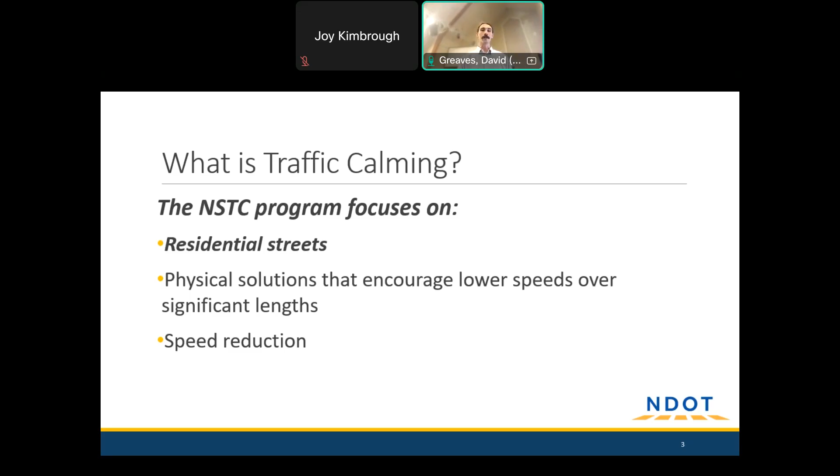So jumping into the program overview, what is traffic calming? This is a program that focuses on residential streets, not the arterial boulevards or commercial corridors, mainly focused on neighborhoods. The projects we do focus on physical solutions to encourage lower speeds over significant lengths. We don't tend to do spot treatments or single intersections - people apply for whole segments of street, several blocks at a time usually. The primary goal of this program is speed reduction, which ultimately ties into safety. We'll talk about that in more detail in just a minute, but you'll notice that those are the things our tools will tend toward.

The reason safety and speed are so closely linked, and why reducing speed results in better safety outcomes, really comes down to physics. When a pedestrian is struck by a vehicle, they have a pretty good chance of surviving if the vehicle is going 25 miles an hour or below. That chance unfortunately decreases as speeds climb - at 35 miles an hour that goes down to about 2/3, and at 45 miles an hour you don't really have a good chance at surviving. So when we see streets in neighborhoods where people live overlapping with high speeds like that, it's an indication to us that street is a pretty good candidate for traffic calming, just to get the driving behavior a little more in line with what a safe neighborhood street might look like.

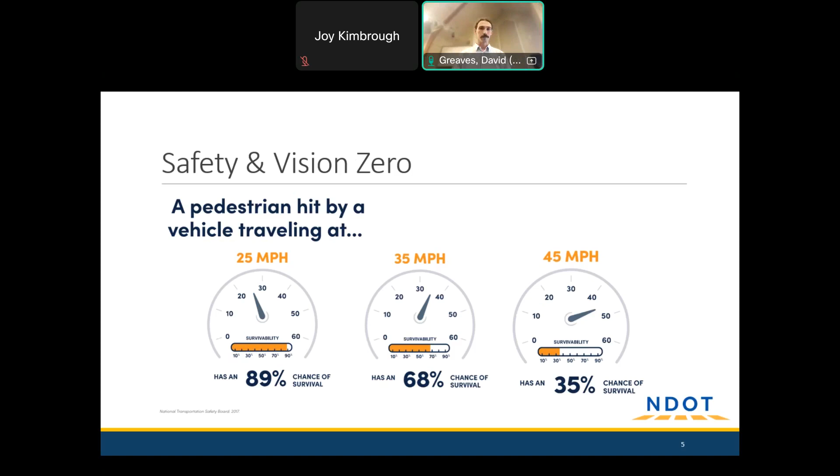This is a really popular program. In March of 2025, when Rawlings Road was selected, y'all were one of 25 streets chosen from a pool of just over 600. We'll talk about exactly how that selection process happens in a bit. All that is to say, there are a lot of traffic calming projects that have been done, but even more that are seeking to be done. So we work as quick as we can, but there is a lot of demand around Davidson County. Just so everyone knows, there is a live traffic calming project tracker, and a screenshot of that is on the right side of the screen.

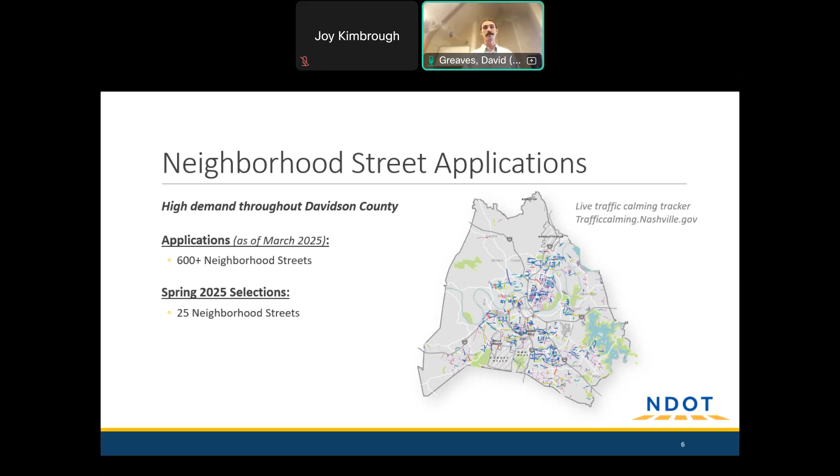It basically color codes streets as they've applied, get selected, and then move through the process. There are a few tools that the traffic calming program has in our toolbox. We'll take a look at those in detail in just a minute, but there's a lot of things that Metro does that this project is not really a good fit for. Sidewalks are a good example, traffic signals, bike lanes, things like that. We do want to make sure everyone is aware of Hub Nashville as a resource to make requests from Nashville's government for all sorts of things. That can be accessed by calling 311, going to hub.Nashville.gov online, and there's also a mobile app if anyone prefers to use that way. If we do encounter anything that you all are interested in that would be a good fit for a hub request, I'll be sure to let you know and help you access this if you'd like.

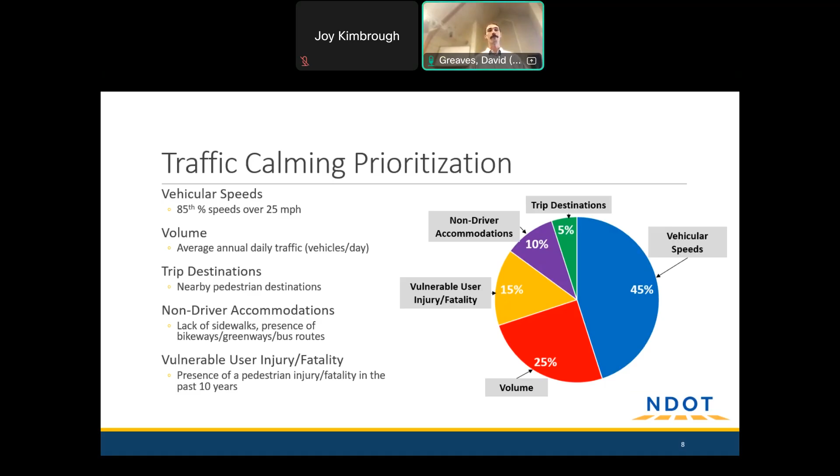So on to how Rawlings Road was selected. Basically, when a street applies, we take the application and then have a period of time when we study all of the streets that have applied. We measure speeds, we count the volume of cars, and we look at a few other factors: crash history, whether or not there are sidewalks, and how close a street is to things like schools, community centers, things that might generate pedestrian trips. So all 5 of those get a score, they're lumped together, and every street gets a score, and those are all ranked top to bottom. So basically, y'all wound up in that top 25 through that kind of data-driven process.

Some of that data that we collected on Rawlings Road was the 85th percentile speed. That was 38 miles an hour. What that means is of everyone that drove on the road that day, 15% of people who were measured were going above 38 miles an hour, and 85% were going 38 or below. So that's just a statistic that we use to gauge the general speed on roads and compare them amongst each other, but it is by no means the maximum or the average, anything like that.

We also counted 616 vehicles used Rawlings that day. I'm sure, as you all know, that's way more than live on Rawlings, so we suspect there is some cut-through traffic going on. And then you have a pretty narrow street - 19 to 20 feet is just about 2 normal travel lanes. And that'll impact some of the tools we have at our disposal.

This is a map of the project. It's just this short section between Clarksville Pike and Eaton's Creek Road. This magenta line here does mean that the other side of Rawlings has applied with a separate application, so they also have data that are being ranked and scored. We hope it'll get selected sometime soon.

So that is kind of the big program overview. And now I want to hear from you all just sort of about your street before we go and talk about the toolkit. So I guess one question to start off with is what do you all experience on Rawlings that traffic calming might be good for?

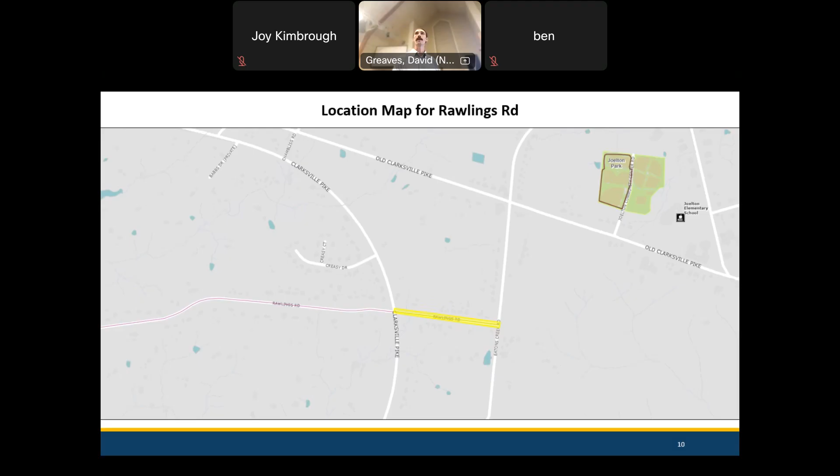Yeah, understood. I think there's supposed to be a limit on trucks, delivery trucks and the like, unless they're delivering on the street—they ignore that too. Is it trucks that are just coming through, or are they delivering? We get semis, dump trucks. Nancy Cole is one of the biggest—oh, I see, like full semis, tractor trailers, not small ones. Tractor trailers getting back up on the 24. These big tractor trailer trucks coming through there.

I think a lot of this is a product of what's probably going to end up being a Hub Nashville request, which is there's no traffic light at the end of Old Clarksville Pike where it meets Clarksville Highway. Even though that's a wider road with a higher speed limit, nobody uses it because you can't make the left-hand turn from Old Clarksville Pike onto Clarksville Highway due to a blind hill. So it's only advantageous to go that way if you're making a right turn. Anybody wanting to make a left uses Rawlings as a cut-through.

So it almost sounds like if we vote yes to traffic calming measures on it, it might need to be paired with a Hub Nashville request to put a traffic light in at the end of Old Clarksville Pike, so that traffic is directed that way onto the higher speed limit, safer road.

That's the same with the fire department. The fire department comes through Rawlings, which I don't mind, believe me. But the way the fire hall is structured, when they come out for a fire, they have to make a right turn, a 90-degree turn, for about 100 feet. Then they have to make a dead stop at Eatons Creek Road. Then by the time they get up to speed, they have to slow down again to stop and make another 90-degree turn onto Rawlings Road to get in line. It takes them forever just making a 90-degree turn.

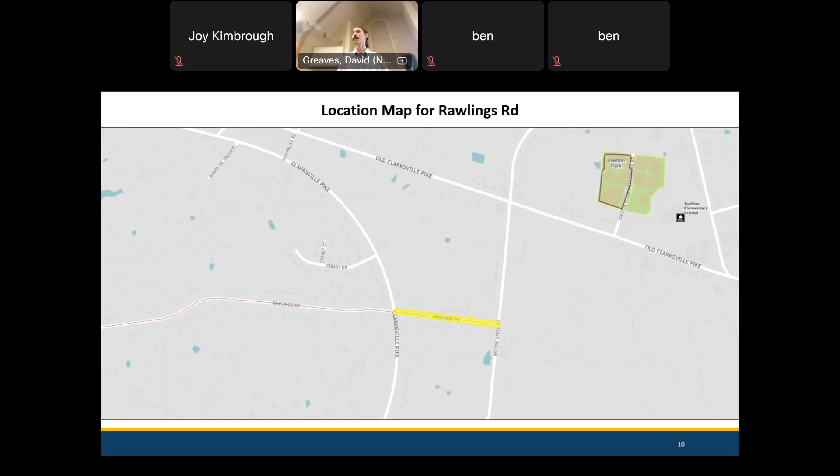Diving into the toolkit, the most common traffic calming measure we use in Nashville is speed cushions. Most people have encountered these somewhere in Davidson County. They work similar to speed bumps but with a higher target speed, so they're a bit longer than the kind you'd see in a grocery store parking lot—we're looking for folks to go 20-25 mph, not 5-10. They have gaps, deliberately 6 feet wide, so they have reduced impact on emergency vehicles. Fire trucks that use Rawlings have wider wheelbases than private cars, so they're able to handle these better and aren't as disrupted as smaller personal vehicles.

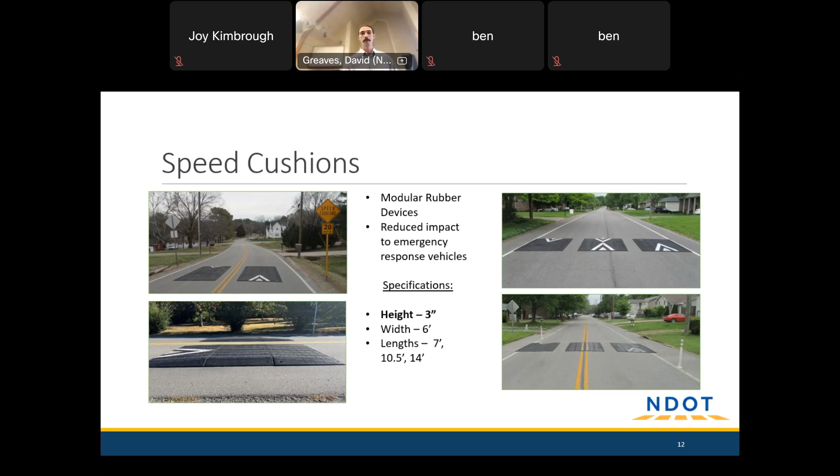Similar to those are speed tables, made of the same materials—modular rubber devices bolted onto existing asphalt. They work the same way, except they don't have those gaps, so we probably would not consider them on a road like Rawlings, since we know it's used by emergency vehicles and we don't want to inhibit their operations.

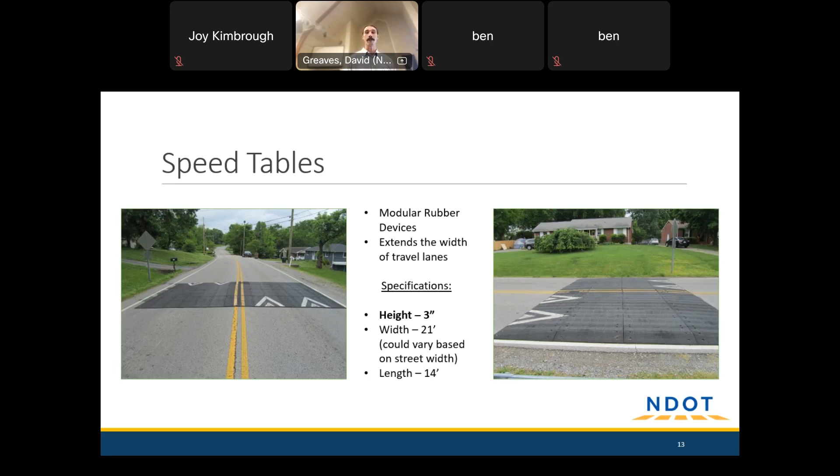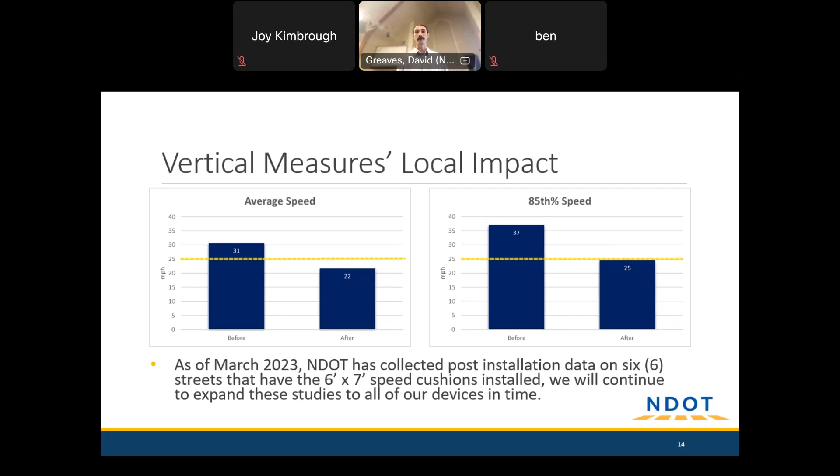Now, not every road is suitable for vertical measures. If it is especially hilly or curvy, maybe the speed limit is higher than 30. That's kind of our maximum.

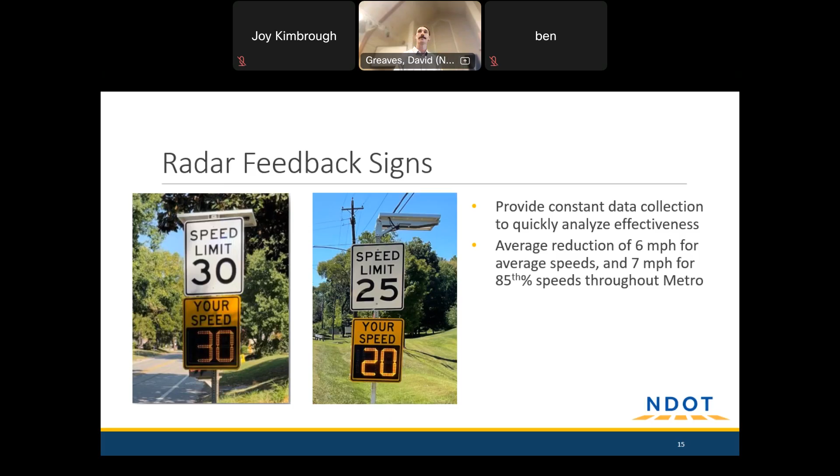We have radar feedback signs. These report the speed one is going as they approach the sign, hopefully serving as a reminder to slow down if you're speeding. Unlike vertical measures, these don't physically affect vehicles, and there's no enforcement to them—it's not like taking pictures of license plates and sending tickets. It's just an informational device, but we do see that it has some speed reduction effect.

On wide roads, we sometimes do narrowing. This is painting white edge lines on the side of the road to take what would be a road that's maybe wider than it necessarily needs to be, and shrink it down to a little bit more of a claustrophobic feel. That can slow down speeds just by psychologically making it less comfortable to go really fast.

But again, it doesn't physically affect vehicles. It's more of an informational tool.

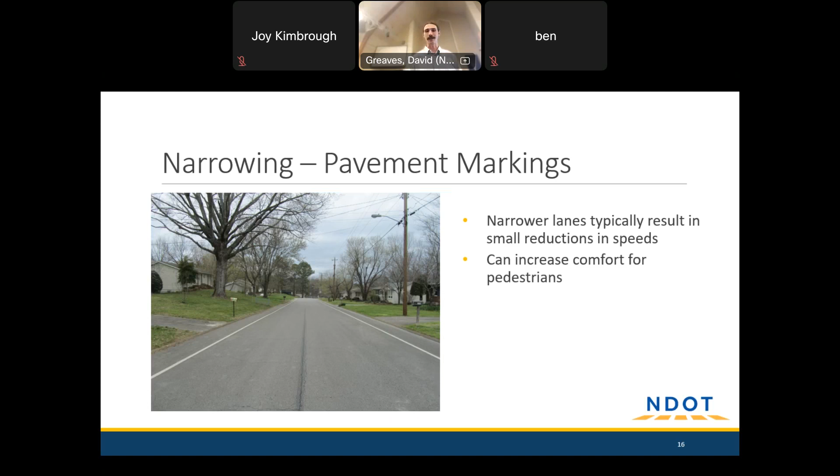I saw your hand raised up—do you have a question? Oh, great, awesome. Well, to that point, anyone is welcome to ask questions. This is a small enough group, we can just kind of go by hand raising and such.

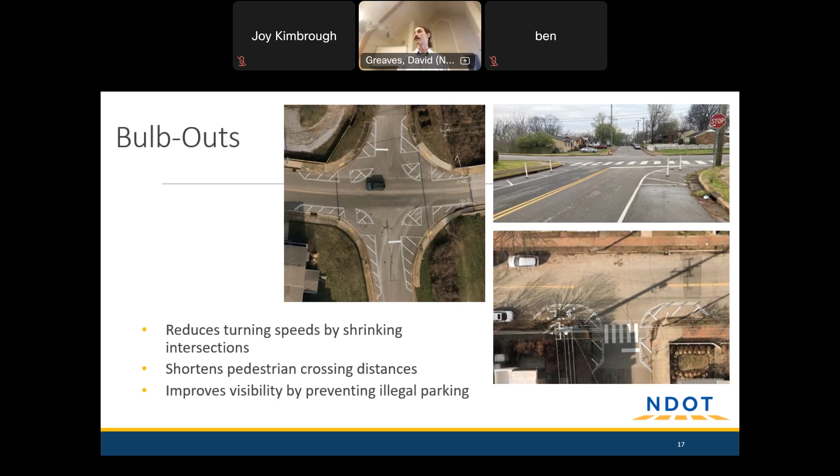Moving on to bulb outs. At intersections that have a lot of excess asphalt, that can make it easy to take turns faster than is safe for neighborhoods. So when we see intersections like these, we sometimes propose bulb outs—narrowing the road at the location of an intersection. Advantages include slowing down cars as they're making turns, and reducing the distance pedestrians have to cross while conflicting with vehicles. In neighborhoods with a lot of on-street parking, it can also help enforce existing regulations that disallow parking too close to a crosswalk, improving visibility and making pedestrian crossing safer.

On wide roads, we can do chicanes. This is where we take a wide but straight road, narrow it, and zigzag it back and forth. This slows vehicles by forcing them to maneuver as they're going along the road, rather than a straight shot where it might be more inviting to go quickly than the speed limit.

Rawlings is too narrow—you just got those two lanes as it is. So we're not entertaining chicanes on this street.

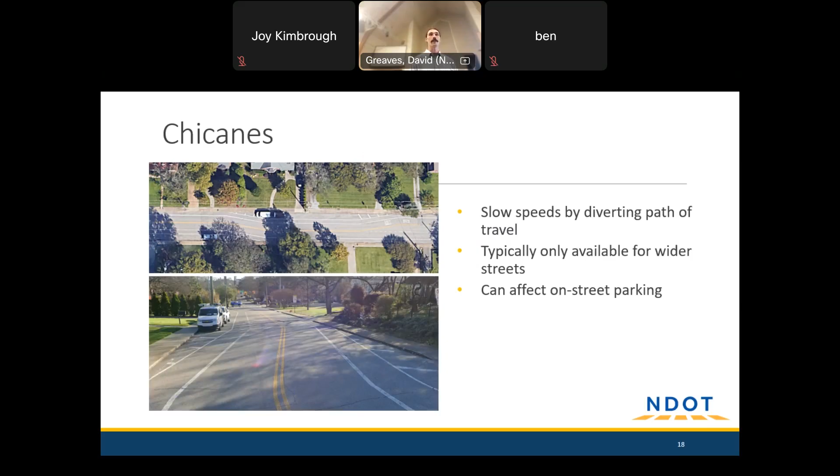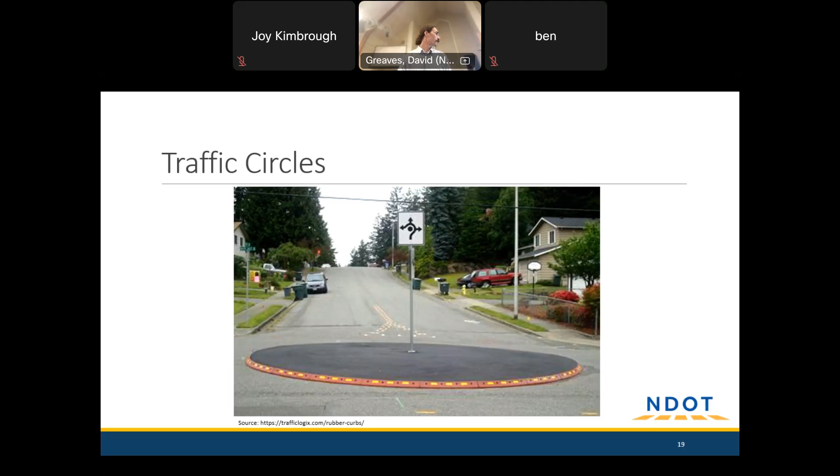We can take any questions about those, but I'll throw our draft concept up on the screen now. Any questions about what I've covered before I go into detail about what we're thinking here?

Basically, on a street like Rawlings, given how long it is, we can fit 4 cushions if we're going on the tighter side, or 3 would also be a fine design if y'all prefer the longer spacing. Based on what I've heard, I really feel like either one would be an appropriate approach to the street. So I'm curious to hear what y'all think, but that's what we've got in mind so far.

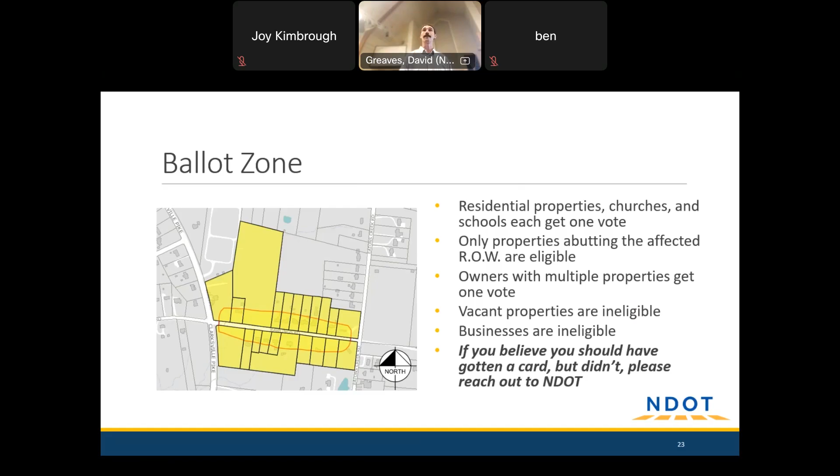And that is it for content. Any questions, or is there anything I can go back to? Or final thoughts—really, we can talk about just about whatever.

Property owner or property—there's a resident that gets the vote? Great question, it's the property owner. We certainly take feedback from anyone who's renting, but in terms of sending out the ballots to vote, that'd be the owners of the properties.

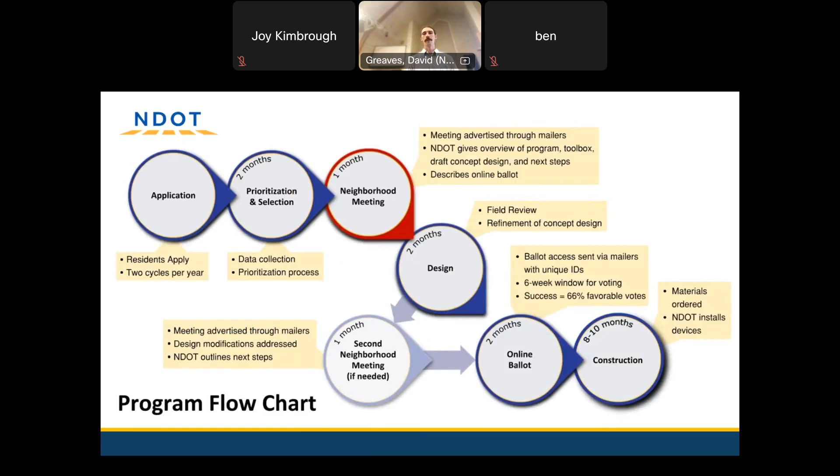Ballot—whatever the quickest way is. Okay, yeah, that makes sense. I don't imagine this will change a whole lot based on tonight, so I think that makes a good amount of sense. We'll plan on that unless we hear otherwise.